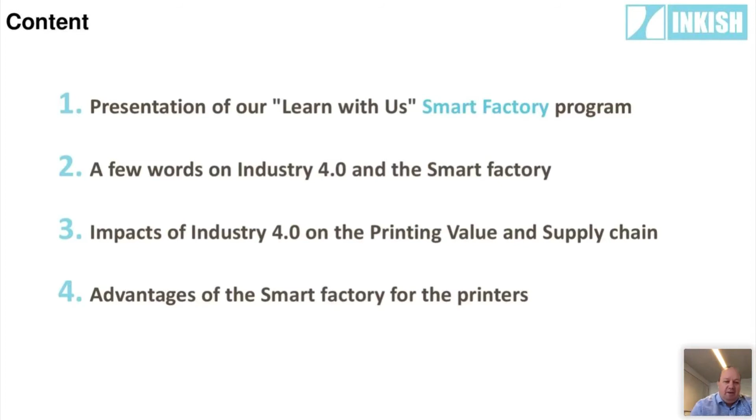So what are we going to do here? Today we have the presentation of the Learn with Us Smart Factory program—that's what I'm doing right now. Then Yves and Jacques will talk a little about what Industry 4.0 and the Smart Factory are. Yves will bring you through the impacts of Industry 4.0 on the printing value and supply chain, and we'll talk about the advantages of the Smart Factory for printers. You can read this directly on the screen, so it shouldn't be a big surprise. I think Jacques will take this one.

Maybe Morten, it's nice if you explain a little bit about the program. Yes, of course—sorry. Who is also presenting, then? People should know a bit.

As you can see, we have a quite dense program for the next 5 days. We're at the first session here, and afterwards I have a conversation with a woman from a South African printing company, Kayleen Lloyd. She has, with her company, just been through implementation of a digital strategy, and it's not as easy as it may sound. So we'd like to talk to Kayleen about some really interesting subjects. That's the next session after this one, at 11 a.m. CST time.

And then we have what we find really interesting: some breakout sessions. The breakout sessions are great because we are 3 different countries, 3 different cultures, at least 3 different languages. Yves will take the French, Jacques will take the Dutch, and I'll take care of the English versions. We don't have breakout sessions for all days, and some sessions are only in French and some only in English, but you'll get the idea that you have the opportunity to talk more in detail. There's also a very interesting program, but that will be presented a little later.

What is the big difference between 3.0 and 4.0? In 3.0, we're mainly looking at a standalone factory where everything is trying to get as efficient as possible, but they're a bit more isolated locally in their own printing shops and printing plants. While Industry 4.0 is really looking to open up the world of networking, working together with a lot of vendors. But we'll get a bit more into the detail in a moment.

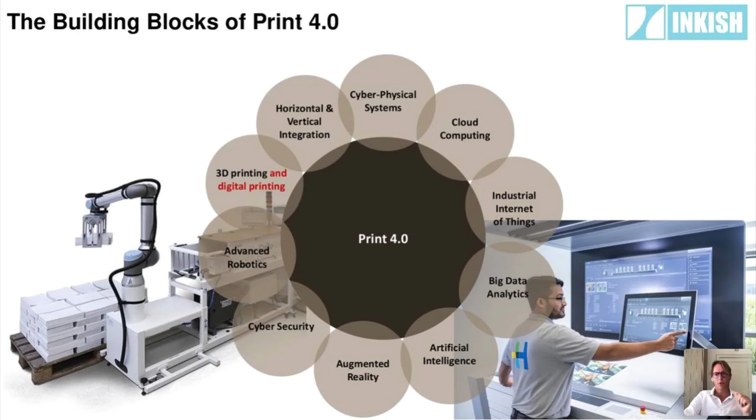So on the left, you can see there are the suppliers. It's very important, and we'll speak about it also during the session, with Yves and Morten. So on the supplier side, there are big changes. We will have to trust, we will have to get alliances with our suppliers, which extend far more than the relationship that we have now with suppliers, because they will also become a key factor in the whole chain, the whole chain of value creation.

And they will be a very important part of our network. So the suppliers are on the left, in the middle we have our own shop, with print shop A and print shop B. What we see there is our production facility.

But as I said, we have cyber physical systems with sensors on the top left in the middle chart. They collect all kinds of data and send all of this information up to the cloud. In that cloud, that can be, in the case of printing presses, all the data collected in production by machines, computers, etc., that are all interconnected within our production facility. We send it up to the cloud.

So on the impacts of the printing industry and the closer integration, I invite Yves to give a little word on this. Thank you very much, Jacques, for giving us an overview of the building blocks of the print industry 4.0.

With Industry 4.0, the value chain or smart print shop will be interconnected and will involve horizontal integration through a network and sensors. This integration will aim at optimizing the value chain of the company in printing and product manufacturing by connecting all or part of the graphic chains beyond the frontier of the printing company, whether, for example, ink suppliers that you see on the left, or high-tech partners, but also on the right, the warehouse and customers.

In comparison, Industry 3.0 has been the phase of vertical integration with the first workflow implementation based on two data formats: job definition format (JDF) and job messaging format (JMF). The goal of this integration has been to automate process steps through the integration of different systems and applications.

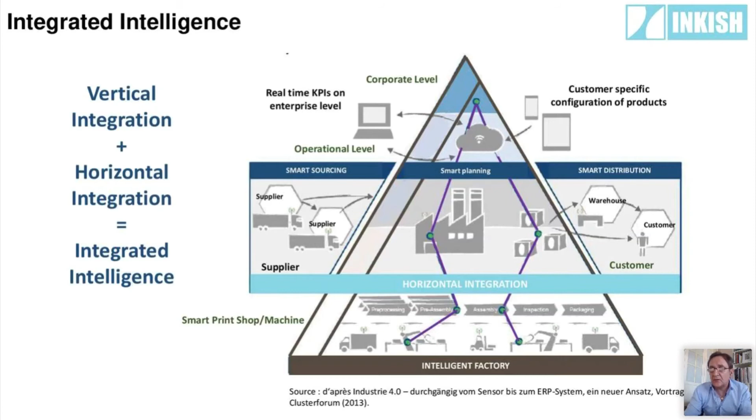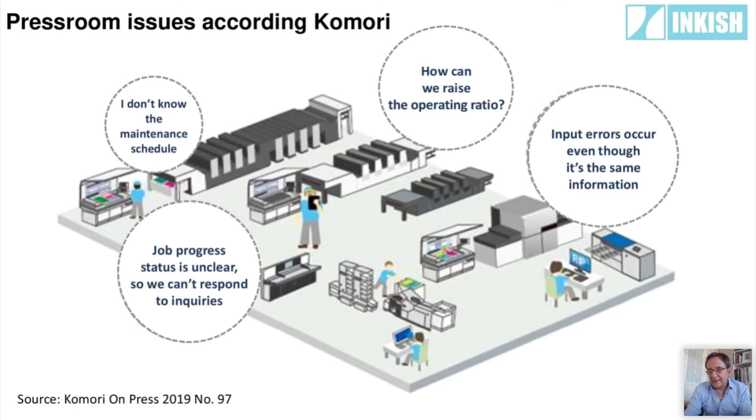Komori gives an example of the benefits of closer system integration into their KP-Connect solutions. For example, operating status is available anytime and anywhere, operator daily reports and manager daily analysis are created automatically, schedules can be optimized, and jobs on each press are visible, and so on.

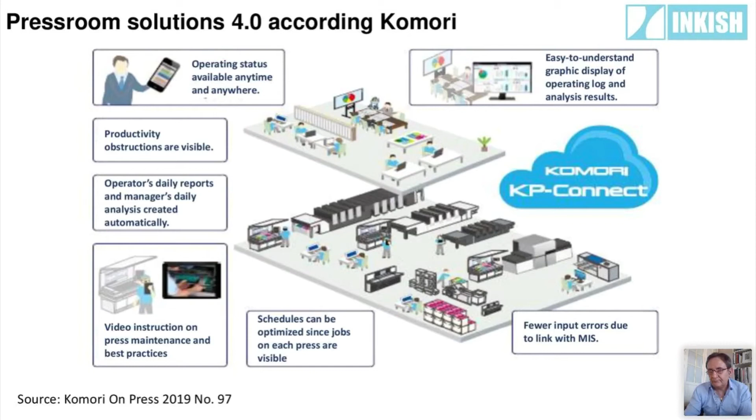Now, regarding the impact of Industry 4.0 on the printing value chain: in the day of Industry 3.0, the internet mainly impacted printing companies on how to sell their printing products, with web-to-print platforms allowing greater customer involvement, particularly in terms of co-creation. The use of the internet automated order entry and saved time for both customer and company.

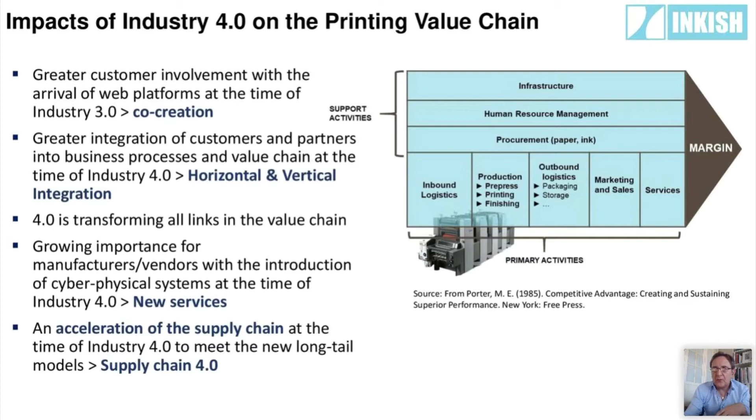With 4.0, this is transforming all links in the value chain, as we can see on this slide. In the day of Industry 4.0, it may be the production activities, printing and finishing, but also outbound logistics and more broadly the supply chain, with cyber-physical systems, that will be disrupted.

Computer automation and even robotization with automatic make-ready already existed in printing plants in the day of Industry 3.0, but the possibilities offered, in particular by the Internet of Things, the IoT, are revolutionizing their use. Industry 4.0, with implementation of cyber-physical systems, will promote in printing and finishing shops a self-regulated production, more precise and agile planning.

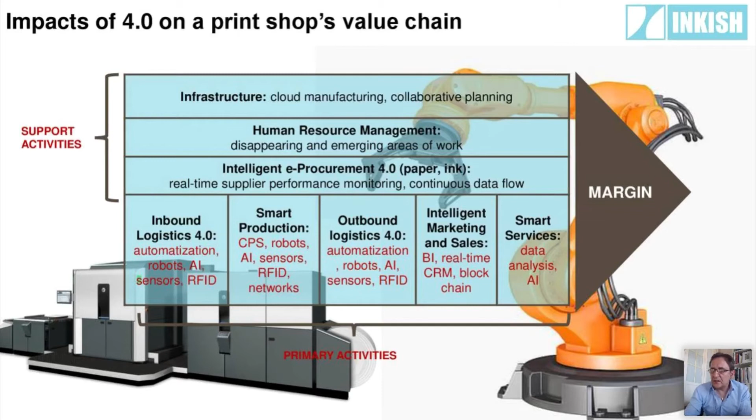By making printers much more flexible at all levels, it would be possible to take advantage of the ability to print by the unit or in very small quantities. But you discover that each activity, primary or support activity, is impacted, even the marketing and sales department with business intelligence, and here blockchain and smart services, thanks always to data analysis and artificial intelligence.

This slide's purpose is to show an acceleration of the supply chain. In the day of Industry 4.0, the different players in the supply chain are increasingly interconnected. Printing companies and their customers are focused on improving the total performance of the supply chain so they can offer better value to customers. The greatest impact on the structure of the graphic chain can be expected from the smart logistics and smart factory concept.

It's mainly thanks to RFID and NFC technology. The supply chain will be able to be further digitized and benefit from the information collected in real time, the current state and logistics activity.

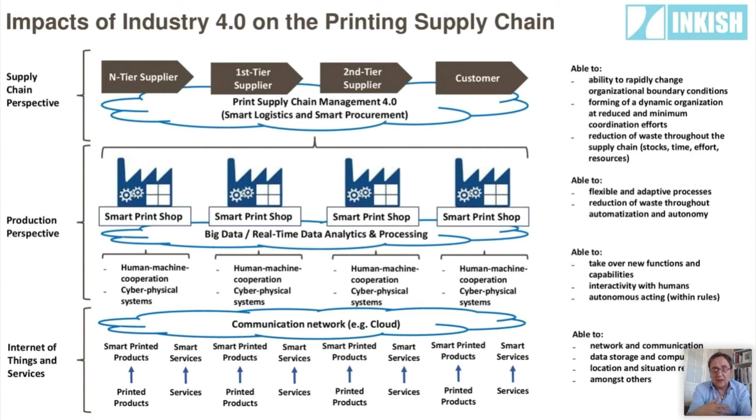I think this slide is one of the most interesting. What's really important is that individual companies, including printing companies, are no longer competing as standalone entities, but rather as supply chains. They are now entering the era of network competition, where awards will be given to organizations that can better structure and coordinate managed relationships with their partners.

Through its value chain, this new value chain 4.0, the graphic chain puts the customer at the center by assessing its personalized or even individualized needs, and organizes its supply chain to modify its process accordingly.

Printers and other manufacturing companies are invited to transform themselves into integrated networks, as shown in this slide, in which companies from the same sector, but also from different industries, combine their core competencies and capabilities. In concrete terms, the aim is for companies to take advantage of the skills of the network partners in order to meet the market needs.

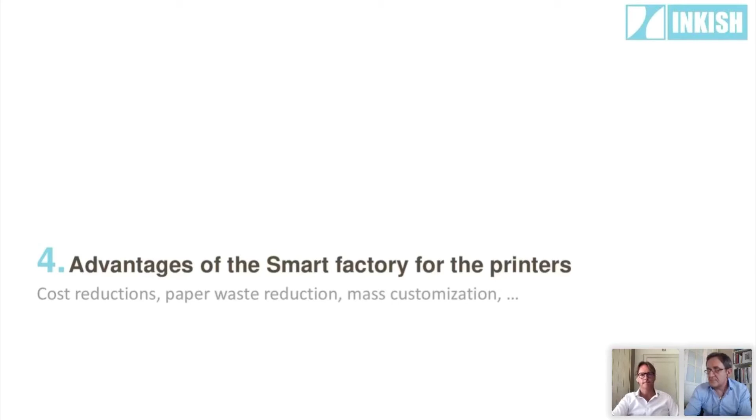Yeah, Yves, thanks. Without further ado, we'll get into this a little bit, the advantages. So as you can see, the advantages mainly focus on cost reductions, more efficiency. We can see, and of course all of the big data that is going around in this smart factory will be data collected in real time. So that's a big difference as well.

And the real-time collection of data will then give us the opportunity to communicate, as I said earlier, with all the connected chains that are part of our smart print shop - so as well vendors, as well as on the end side, the customer as well. So reduced costs is one of the main advantages, but as well in Industry 4.0 and with smart print manufacturing, the product itself will become smarter, will have the ability as well - the end product will have the ability to communicate within the production chain for one, and probably afterwards also in the value chain.

Let me make myself a bit more clear. Let's think, for example, like a printed label on a bottle of wine, for example, that already exists, but it's a good example. Like when it's at drinking temperature, for example, the label changes and you can see that the wine is at drinking temperature, for example. It's a small example.

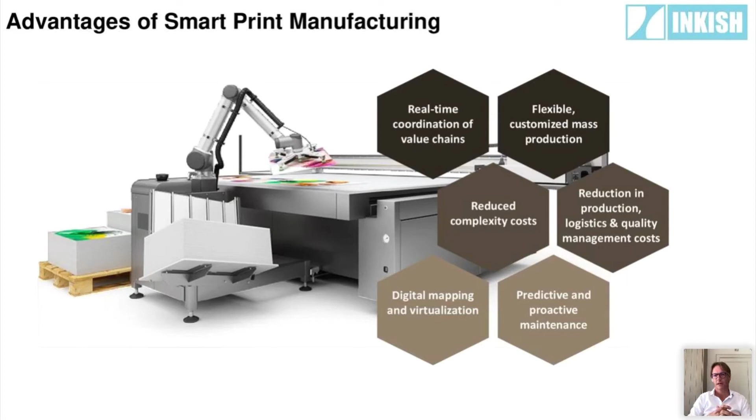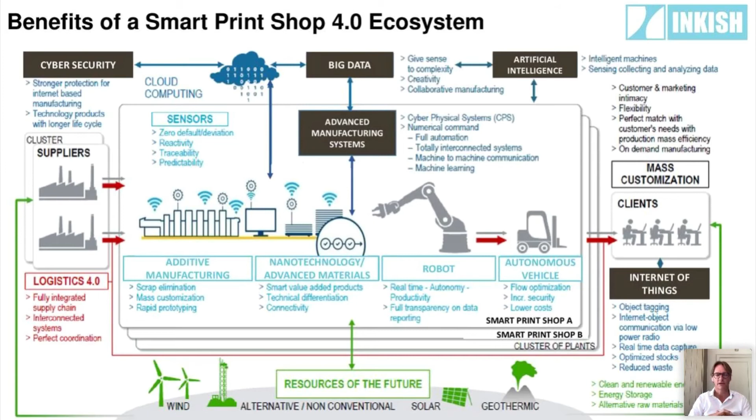So this, what I was also referring to earlier on, is the role of the suppliers within our smart factory and the role they play. Before, maybe they were just like a supplier, or I can't say just, but they were a supplier. They sold the machine, the technology, and then we still had a couple of contacts with them, for example when there had to be maintenance or stuff, and then we saw them maybe 2 or 3 times a year. Now this relationship will get way more importance.

Of course, the vendors from their side have already evolved to this new type of thinking and relation with the smart shop owners, as they will become like a big important part of the company itself, because as data will transfer from the company to the cloud, those partners and vendors will collect this data, be able to manipulate it, send out reports, and through the new technologies with sensors - there are about 3,000 to 4,000 sensors in the press - they add more value to the production process, which will be more automated, and where there will be predictive actions taken. So not only in the production environment, because there will be contact between all the different machines.

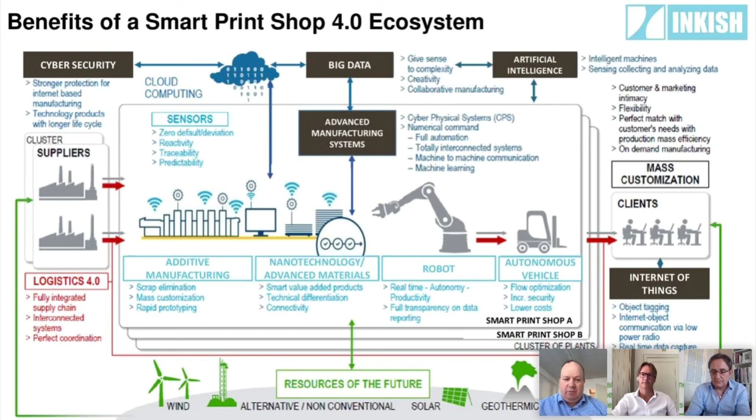So, it's still perfect - yeah, it's just because we have to move on so Yves can talk, because I asked the questions, but I'm actually more interested in the long tail. So Jacques, thank you very much for now. All right, no problem. Let's move on to Yves, let's talk about the long tail. Yes, thank you very much.

All right, Yves, you can take it if you want to on the theory. Turn on your microphone, Yves. Okay, excuse me. Yes, it's very good questions, Morten, regarding JDF and JMF, and the complementarity tomorrow with IoT in order that machines speak together. But...

Thank you. Regarding introducing the new industrial strategy, I think the long tail theory is a way to understand this. The fourth industrial revolution aims to respond to new customer behavior, and the concept of the long tail, introduced in October 2004 by Chris Anderson, aims to offer a large number of niche products through the long tail.

In the case of publishing, for example, publishers have realized they can now monetize titles often dedicated to niche markets at the end of the long tail, for which until a few years ago it was unimaginable to print due to such low demand. Thanks to web technology and digital printing, with no stock and no inventory, these on-demand or single books are printed, bound, and shipped in response to an order placed and paid for online. It's the volume and all the titles that become attractive, provided that the cost of these very small series is close to mass printing - that's what you see in the long tail.